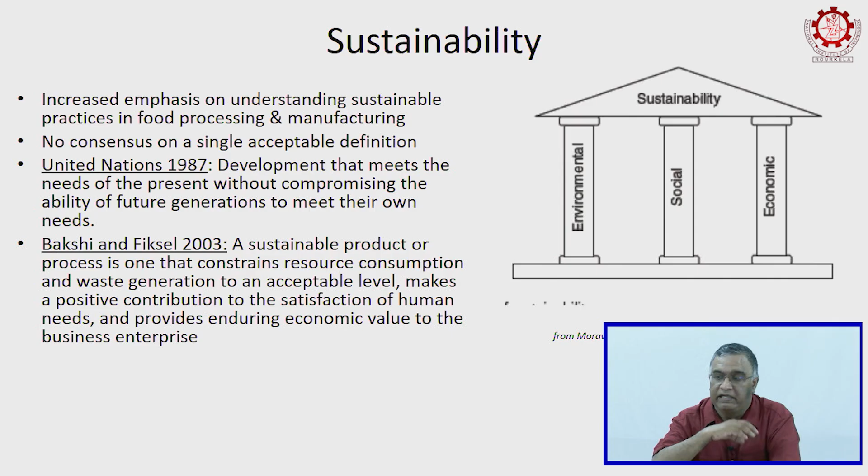Sustainability broadly speaking has three components: the environment, the social aspect, and the economic aspect. So, you cannot just have sustainability primarily focused on the environment and social without paying attention to the economic. You have to have the economic, the social, and the environment all balanced, so that you have a sustainable society.

From a food company point of view, you probably have all these three things interact. You have broadly speaking an environmental, a social, and an economic subsystem. Let us say you have the company here; the company probably receives some energy, water, minerals, all those things. It occupies certain land, uses some capital, and also uses some labor.

With all these things it is going to produce food, and the food is going to support population growth, feed the people convenient food. That profit probably generates some taxes, which in turn helps the society or the government pay for social projects and things like that.

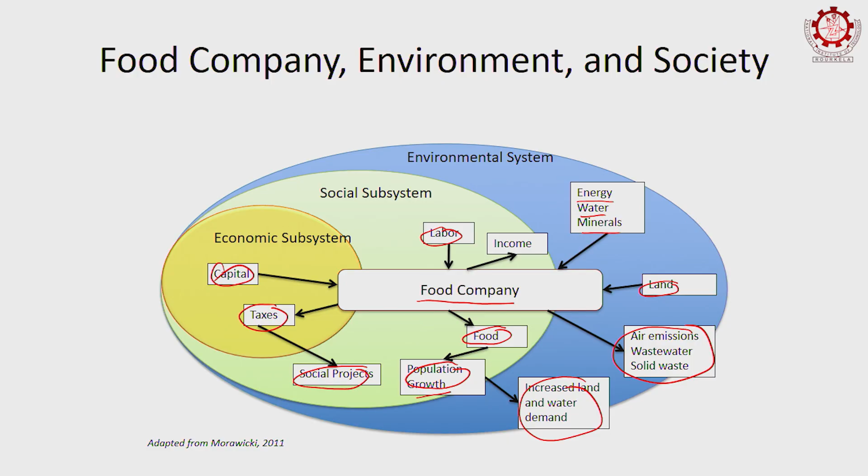So, today food processing is basically linear. That means you start with the raw material, then you probably process it, then send it to the retailer or distributors, then the consumer, then you probably generate waste. So, the waste is going to affect the environment, but there is no effort to fix this problem.

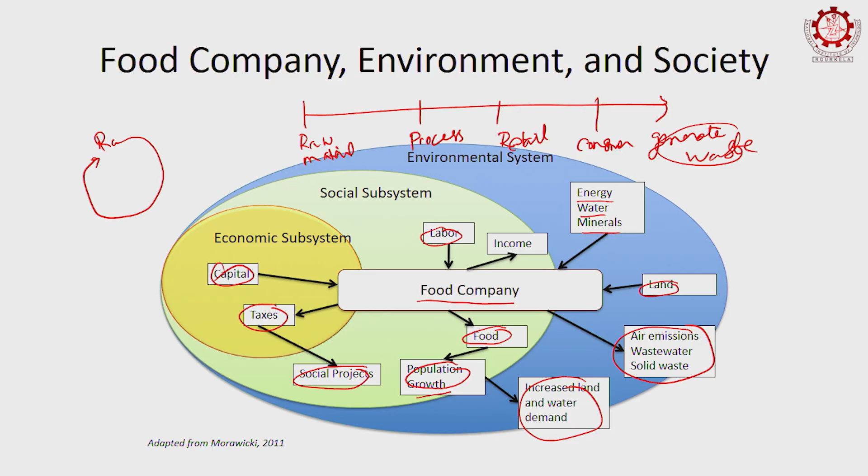So, what we need is a circular economy or circular concept. That means you start with raw material, then go through processing, and then you have a circular concept, so that it minimizes waste and leads to better utilization of resources.

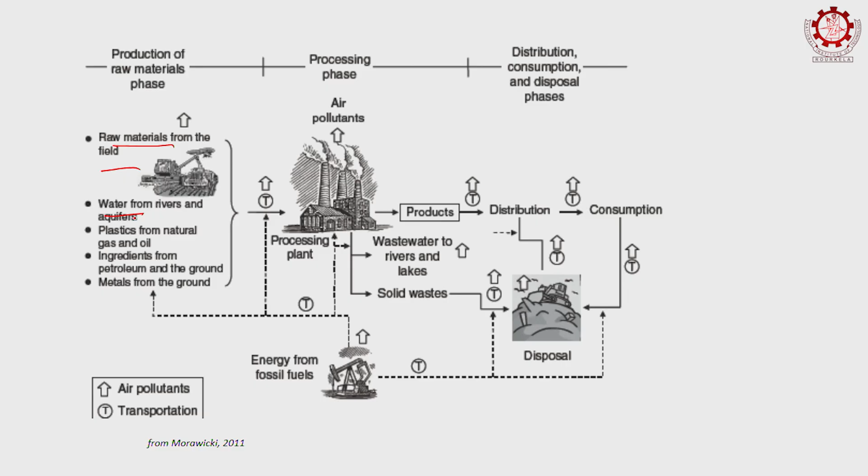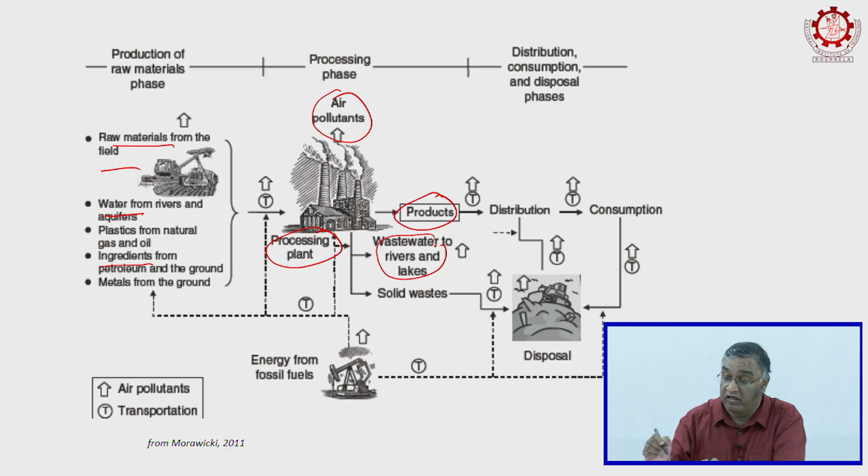To illustrate the same concept: you have the raw material, water, and then ingredients and other things supplying the food processing plant. The processing plant produces air pollutants and then products, but it also generates wastewater, and creates pollutants along the way when you distribute, and then when it goes to consumption, along the way you create some pollutants.

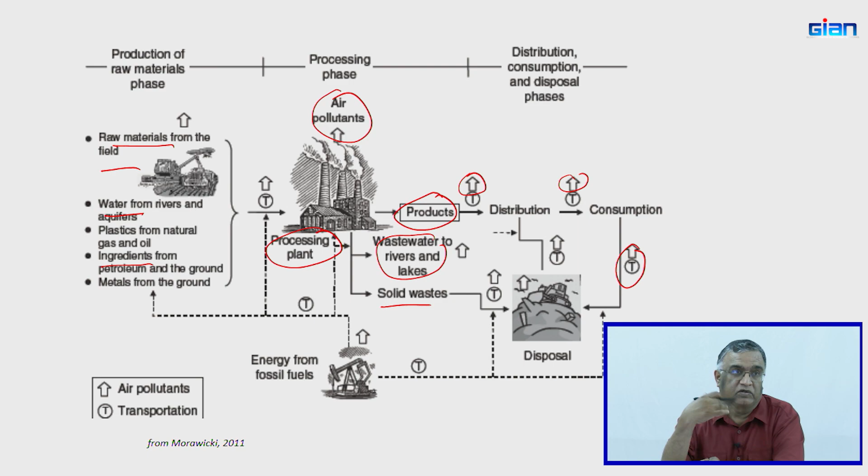It all happens in a linear manner without any effort to recover and have a circular economy. So, there is a lot of waste being generated as part of this economy, and that is where there is emphasis on sustainability and also on improving circularity. The circularity concept is very simple and interesting, but doing it in practice is much more challenging.

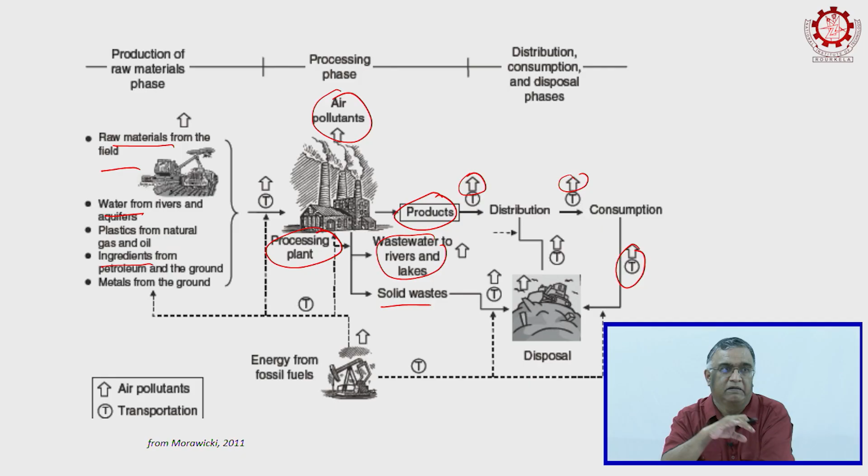So, how energy intensive is food processing? Whether you do pasteurization, canning, evaporation, spray drying, or any other food processing methods, it is very highly energy intensive.

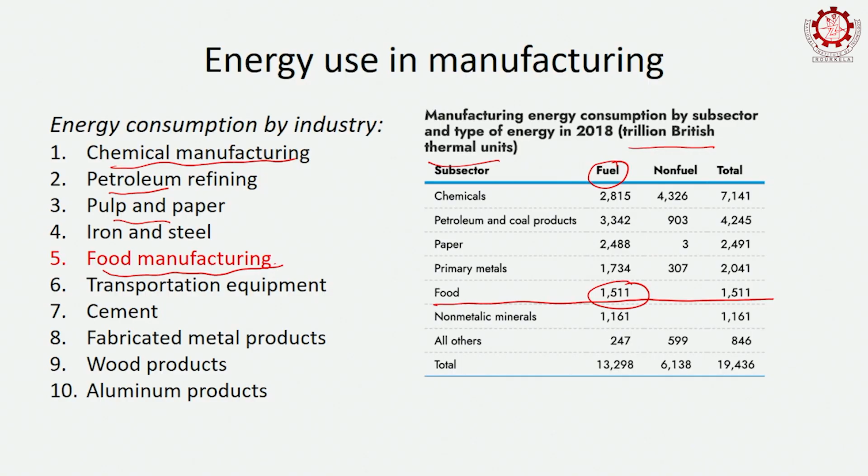When we use food process operations, we use this for various things: heating, pasteurization, cooking, blanching. A lot of food process operations are there. In addition, you can add to the list drying, evaporation, so many things. We do refrigeration and freezing.

This is different country to country. In the US, they have a very robust refrigeration and freezing network, so they are able to maintain that, whereas in India, probably some of the network is relatively in infancy. It is kind of evolving, but nevertheless you use some energy there.

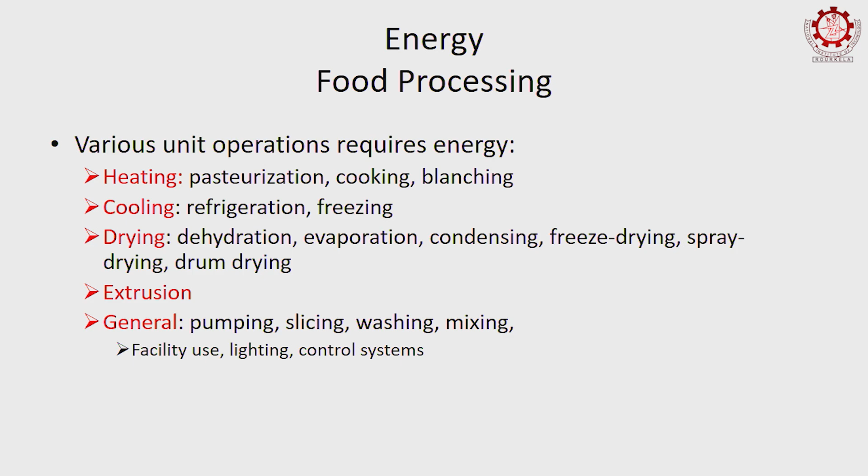You can do processes like extrusion, and then you use energy for pumping, slicing, mixing, different things, as well as use of lighting for the facilities control systems.

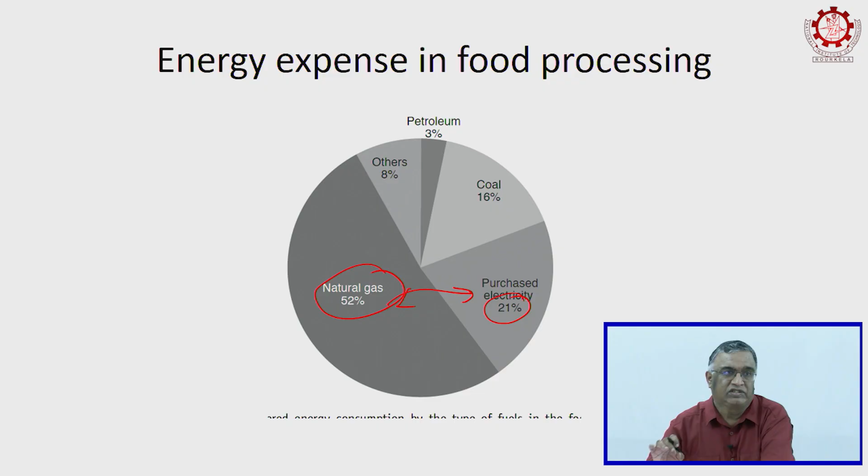But imagine we swap these numbers, maybe 50% electricity used and only 20% natural gas used. Then that electricity, there are many ways you can generate it, right? You do not need to rely upon natural resources. You can probably use in India, for example, solar energy. You can use geothermal, you can probably use nuclear. There are so many energy options available.

That is also much more energy efficient because, for example, when you use high pressure processing, you use electricity to pump and generate the pressure, and then the pressure energy is delivered to the product. There is not much wastage of energy along the way.

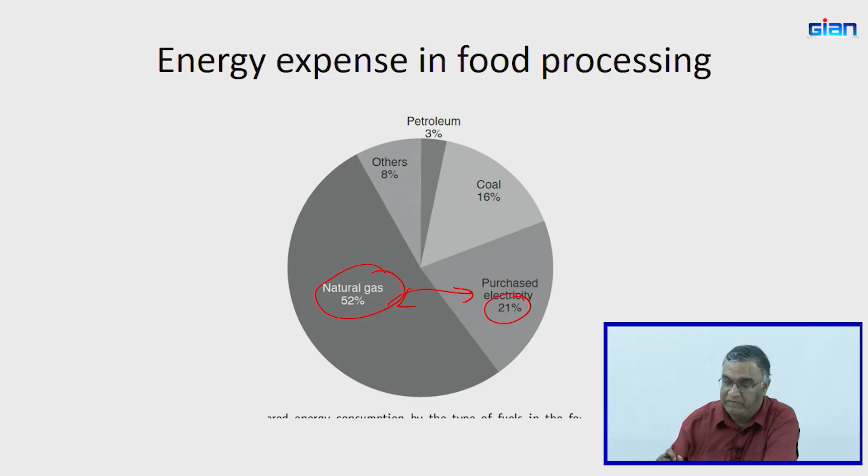Whereas if you use the autoclave for sterilization, you produce the steam, then it is transmitted where there's a lot of transmission losses, and then from the plant side to your processing plant, again a lot of energy losses occur. So that's where attention needs to be paid to switching to more electricity based food process operations rather than relying upon petrochemical type operations.

Within this you probably use about 59% process heat, 16% refrigeration, and then the rest are other categories of energy. What is process heat?

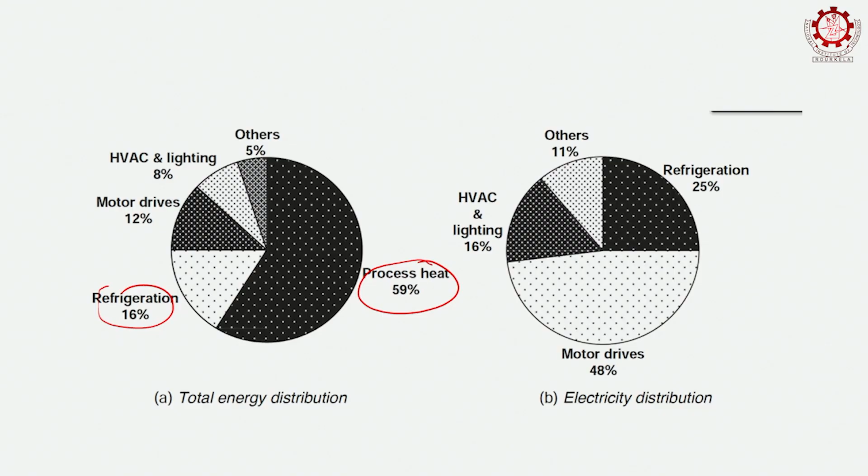I mentioned when you use fossil fuel to generate steam, from the steam you use that for heating your canning equipment or drying various things. That energy required to generate the steam vessel is oftentimes called process heat in the literature, particularly in chemical engineering literature. That's probably almost 60%, which is a very major factor contributing to environmental issues with food processing.

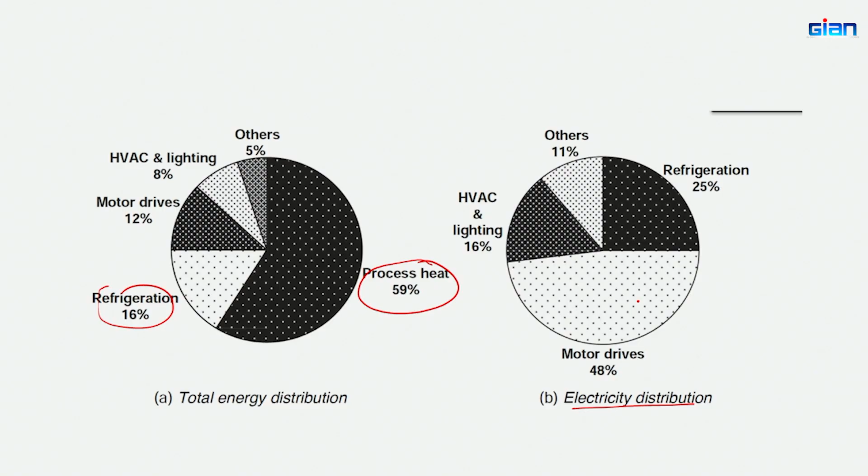Within the electricity use, you mostly use it for simpler operations like driving your motors, lighting, refrigeration, and things of that nature. If you look at the energy distribution, you probably use about 75% of energy for heating and cooling, 12% for process equipment, 8% for facilities.

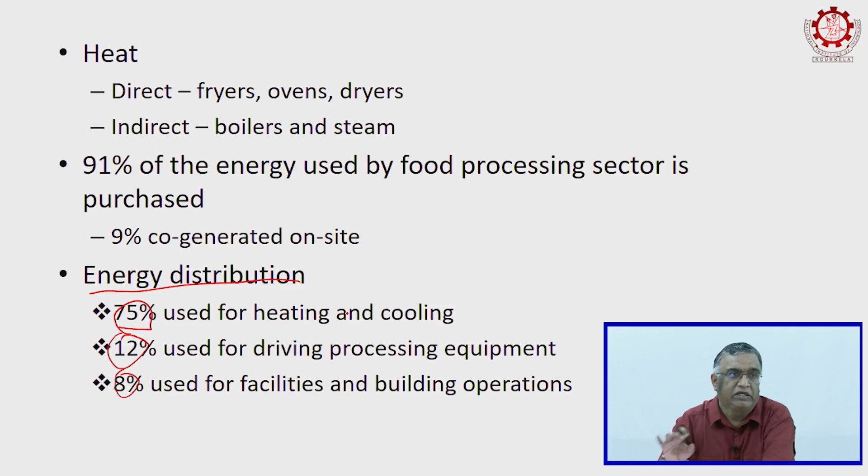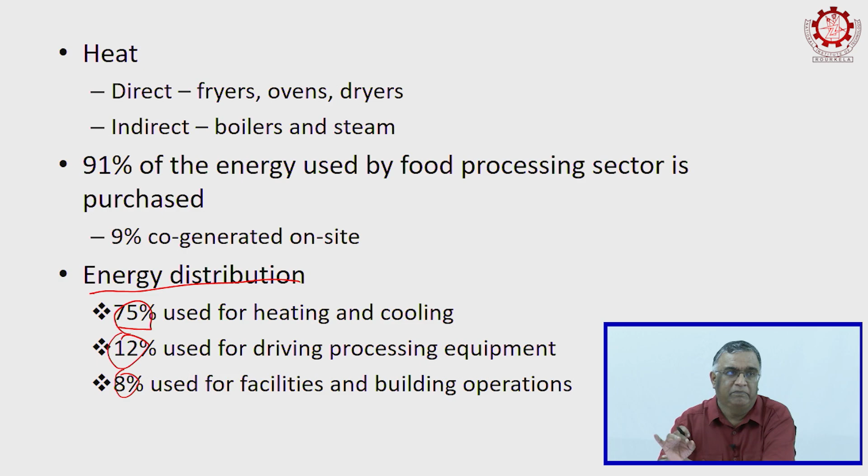This is where you have the opportunity to improve your energy efficiency. Right now this section uses a lot of process heating. If you can switch to electricity, you can probably improve your overall energy efficiency, and also help reduce the impact, because you may have thousands of food processing plants, each contributing a little bit, and you can get a major thing accomplished.

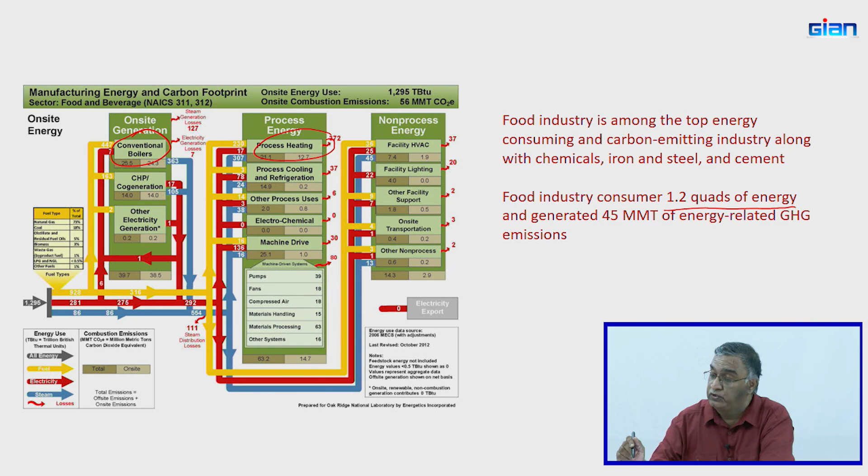According to some estimates from the US Department of Energy, about 1.2 quad of energy is generated, resulting in probably 45 million metric tons of emissions.

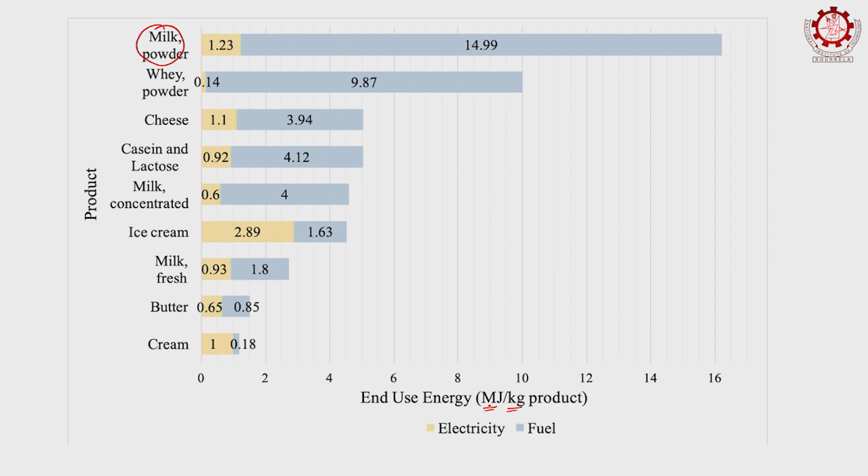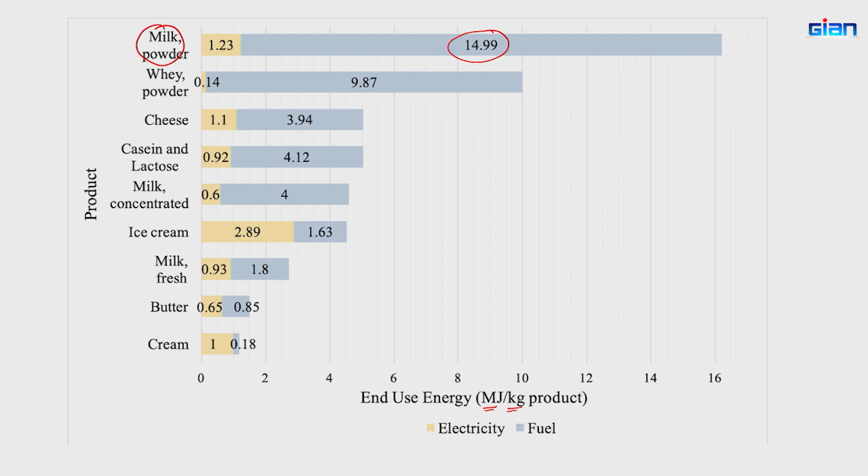That's kind of the major portion. Whereas if you look at something like cream, you use very minimal energy from fuel, whereas about 1 unit you use electricity. Look at ice cream: 2.89 electricity, and then 1.63 fuel.

So you can see that depending on the different processing products, you probably have different amounts of electricity versus fuel used. The goal is to maybe increase how much electricity you can use, since you can always generate electricity through a variety of ways that have minimal impact on the environment, rather than relying on petrochemical type products.

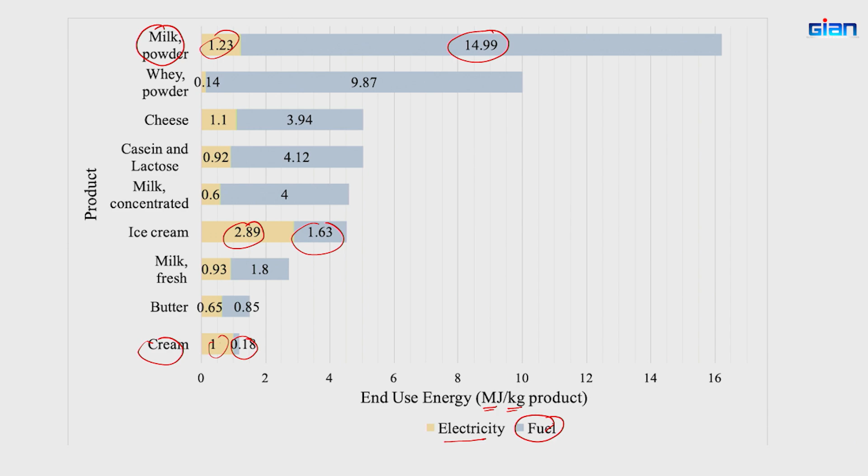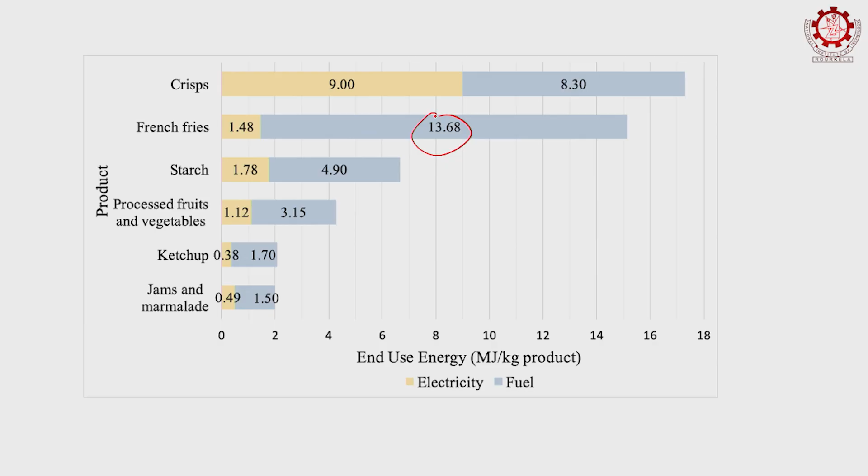Here are some additional things. Look at French fries: about 14 megajoules per kilogram versus 1.48 or 1.5 for electricity. Whereas if you look at jams and marmalade, it's a relatively simpler operation, about 1.5 versus 0.49.

So the take-home message is that most current food products are energy intensive and rely more on petrochemical energy than electricity, which leads to some potential environmental effects.

We talked about various food process operations in this class, particularly looking at advanced thermal and non-thermal processing methods such as pasteurization and sterilization. But beyond that, there are many other so-called unit operations - for example, drying, evaporation, extrusion, spray drying. There are so many unit operations.

Among all these different unit operations, one of the most energy intensive is drying. For example, if you are doing a drum drying operation, the product is being washed, peeled, pre-cooked, and mashed. Let's say this is a potato type product, and doing a drum drying, you are going to need about...

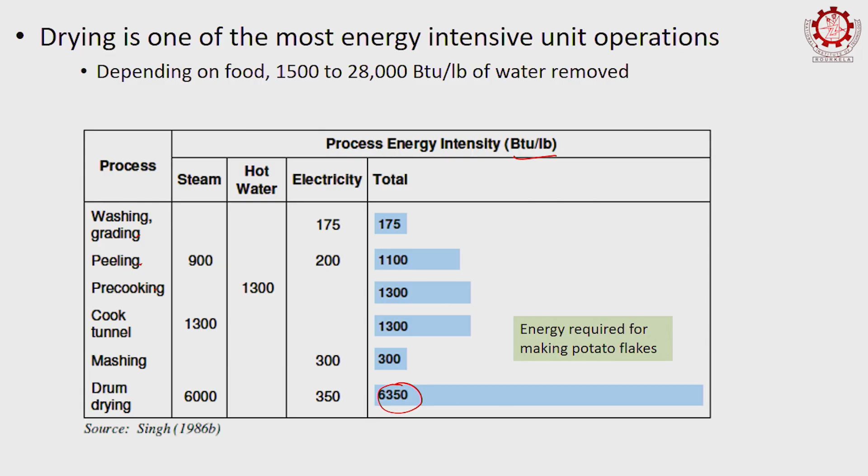So there is an urgent need for developing more energy efficient technologies to significantly reduce energy use, or increase energy efficiency. Now, energy efficiency can be improved in a couple of different ways. One, you can always recommend going and developing new technologies, and I think there is room for that, but you also have the opportunity to fine tune, optimize, and improve existing food process operations.

We talked about drying being one of the more energy intensive operations. So let's say you dry vegetables - rather than directly drying the vegetables, maybe you can add a dewatering step where you take the vegetables and find a way to remove the water, so that the dryer does not need to work that much harder to do its work.

For sugar beet drying, they may use a press to remove the water, so that you can then put them into a rotary dryer and save some energy there. Similarly, a lot of vegetables you can pressure treat.

For example, 300 megapascal or 400 megapascal pressure for a couple of minutes. This is not done for the purpose of microbial inactivation, but it is going to permeabilize the cell membrane. That means within a bacterial cell, or your vegetable tissue, it is going to push the water out, so that when you do the drying operation, the drying kinetics can be much faster.

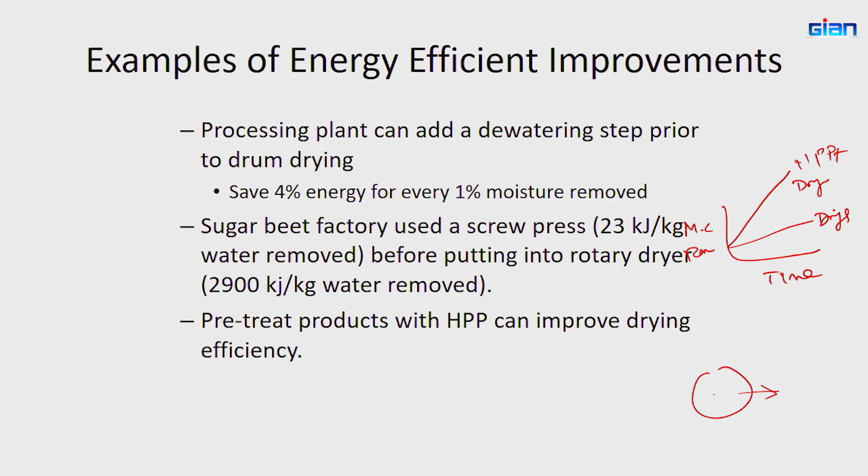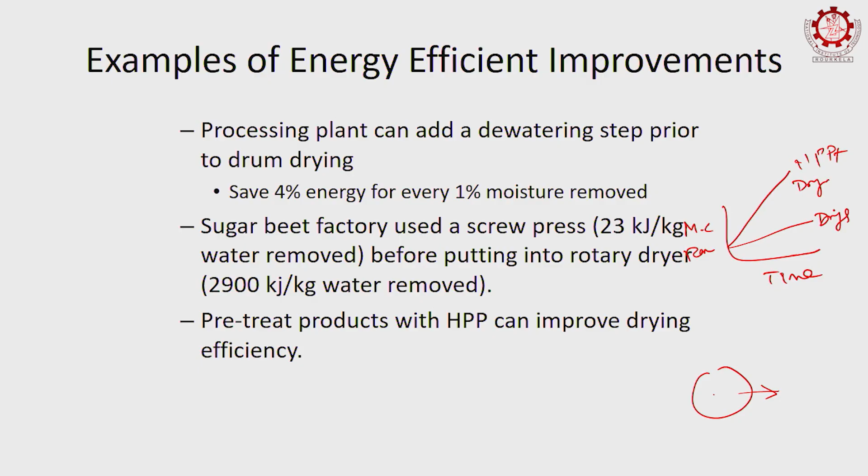The same thing can probably be said about PEF and UV - a number of new technologies have the capability to permeabilize the water. So a lot of processing plants use boilers.

Most of the time these are legacy plants operated for 30, 50 years, and that means maintenance attention to them becomes less and less. A lot of the boilers may have salt deposits and may be poorly conducting heat, transferring the energy. So there's a need for regular maintenance to improve the boiler efficiency, and you can add some insulation to have better efficiency.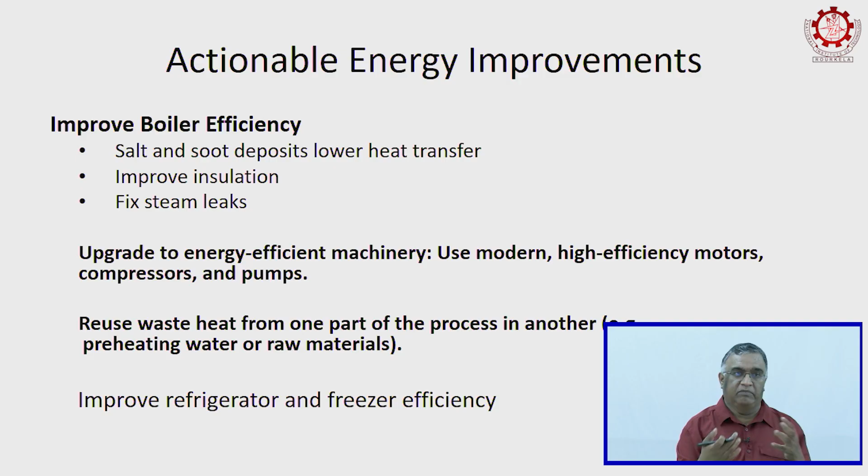When you produce steam with the boiler, there's a lot of steam leak along the way. If you go to a food processing plant, especially those using boilers, you can see some of them are really warm. Part of the reason is there's a lot of steam leak, and if you fix some of the steam leak, that can add up in terms of improving energy efficiency.

You can use energy efficient motors, compressors, pumps, and another thing quite easily done is you can use the waste heat from one part of the process to another.

Anybody know what is the classical technology that does that already? In other words, you are heating a product, then you capture the energy content of the heated product to recover that heat to heat or cool something else. A classical technology does that already - anybody know? It's pasteurization.

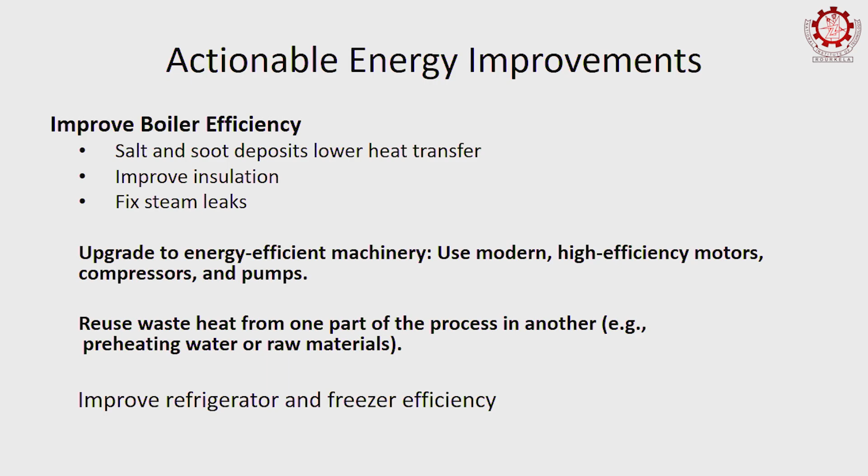If you do the pasteurization study, you can see that when raw milk comes in, it's pumped through, initially about 5 or 10 degrees Celsius, then it goes through homogenization, and here it begins to be heated by the outgoing processed milk. The processed milk is already at a higher temperature, 72 Celsius, so that outgoing milk is going to heat the incoming raw milk.

So two things happen: the temperature of the incoming raw milk increases, so you are accomplishing some heating, whereas the temperature of the outgoing heated milk decreases, so it cools down. Then it goes to the homogenizer, the holding tube, and in this section you're using some heat to bring this to final pasteurization temperature, and coming back here you give out that heat to the incoming raw milk. Then you use some glycol water to cool further, and then you can package them.

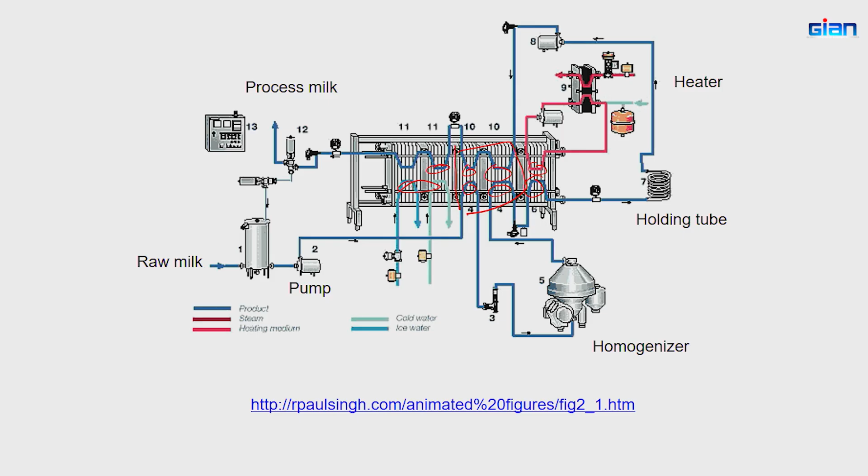So this section where you are recovering energy from the outgoing product to heat, in this case raw milk, is called a regeneration section. If you don't configure this way, you probably lose that heat energy as waste, and you probably spend more energy to cool the product down. Whereas here we can utilize that heat to capture and at the same time get a benefit.

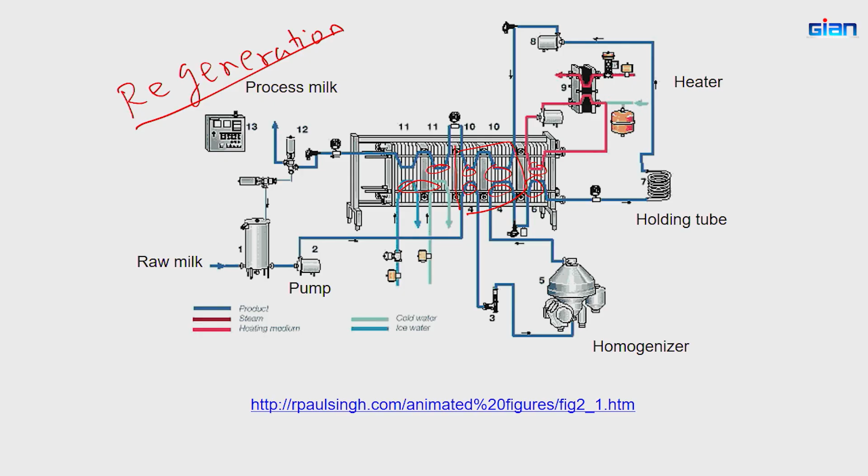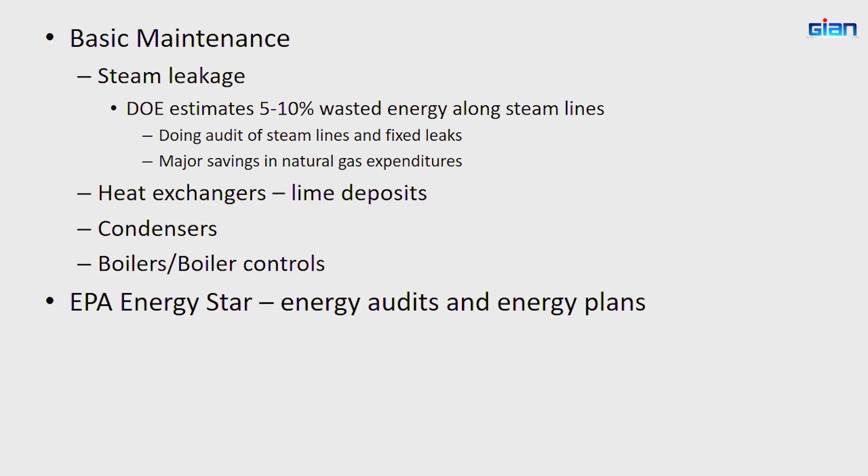So many food process operations can be modified so they can capture energy in an efficient way of operation. We already talked about steam leakage - 5 to 10% of steam energy in steam lines, so you can probably capture steam there. And with heat exchangers, lime deposits may be there too.

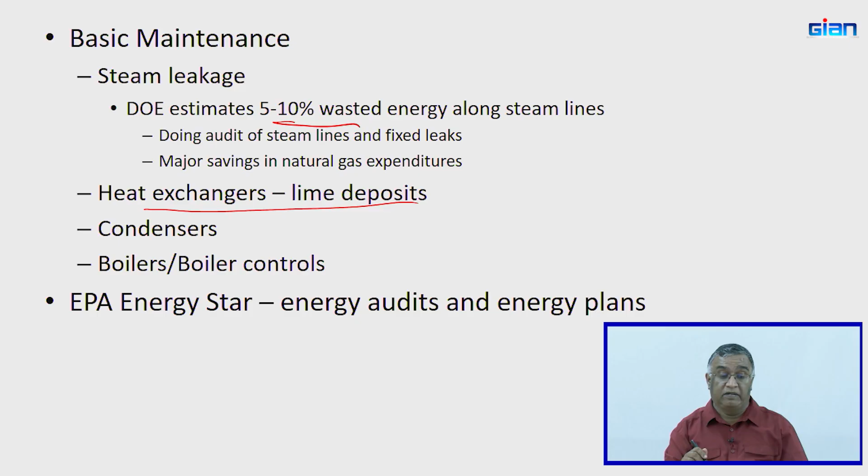Now in the US, EPA has what they call energy audit, energy star plans. They audit different equipment and then provide certification - this is an energy efficient machine. So food processors who want to buy them can choose those so they can have better energy efficiency.

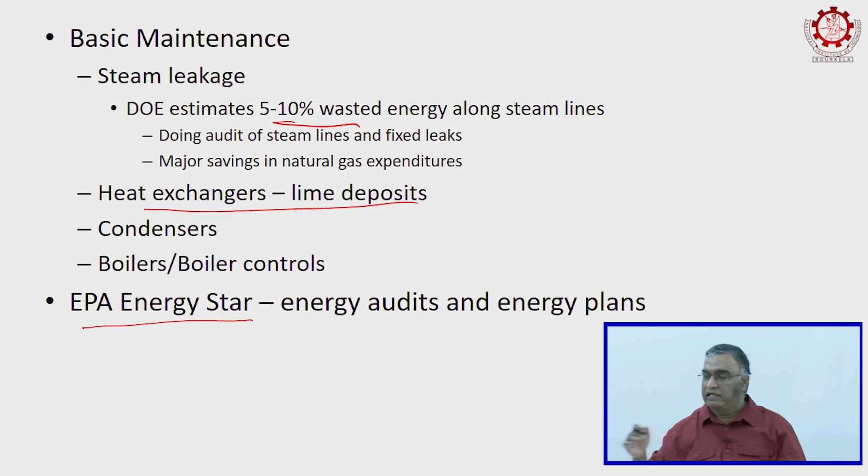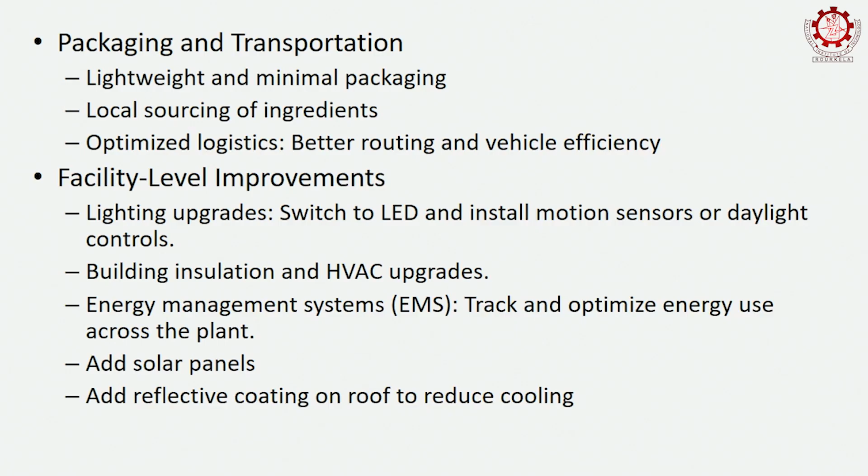Instead of using heavy transport packaging material, you can use a lighter packaging material so you can reduce transportation costs. Why do I need to switch? For example, if you have a processing plant here in Rourkela and you have to bring an ingredient from China or Europe, there's a lot of transportation involved in bringing that ingredient. Instead, can that ingredient be procured locally within Odisha or a neighboring state, so that it cuts short the ingredient cost or transportation cost.

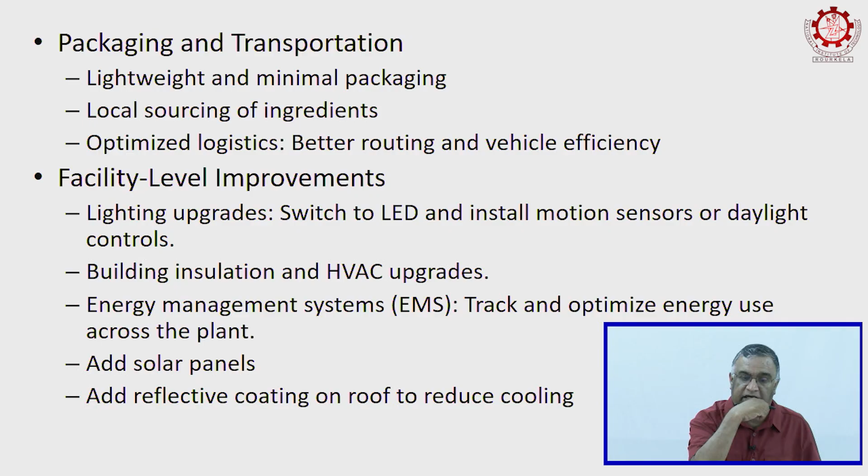You can do energy improvements in the facilities. For example, most facilities are now switching to LED lights, and you can also improve the insulation, HVAC, and add solar panels.

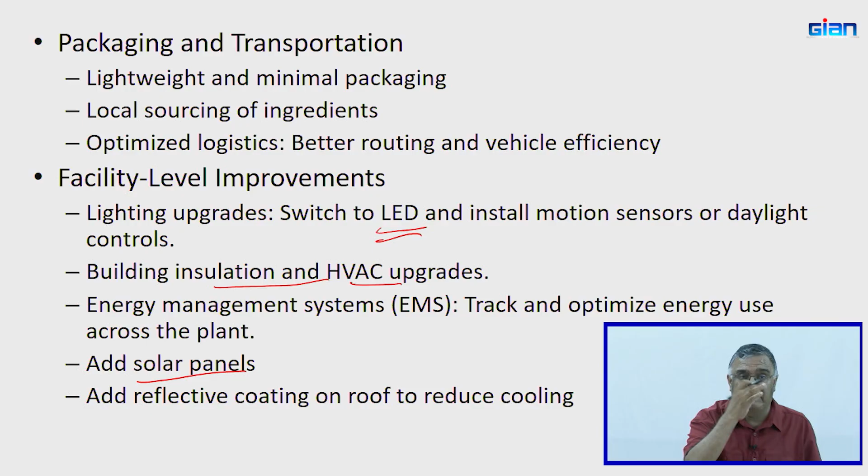A lot of food processing plants have a lot of floor space as well as roof space. You can probably add solar panels on top of those plants so that it can generate electricity that you can use for running your processing plant, so you can significantly reduce the operational cost.

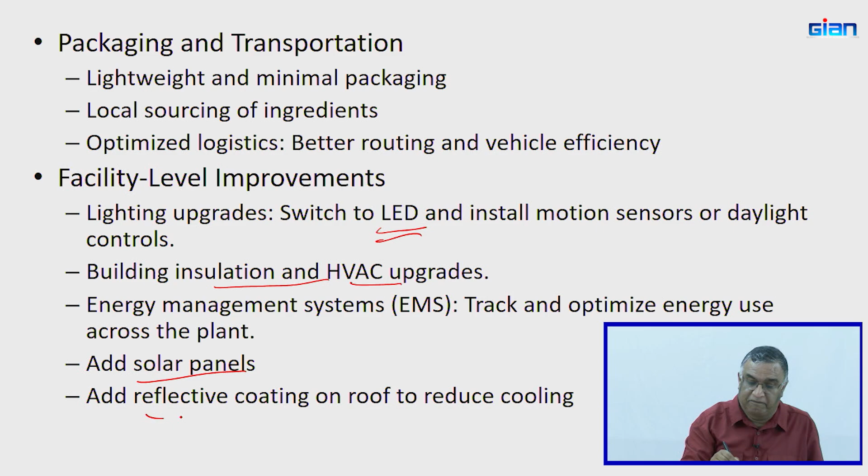If you don't have that luxury, at least you can put what they call a reflective coating on the top of your surface, so that the light rays are reflected and the facility is not overheated.

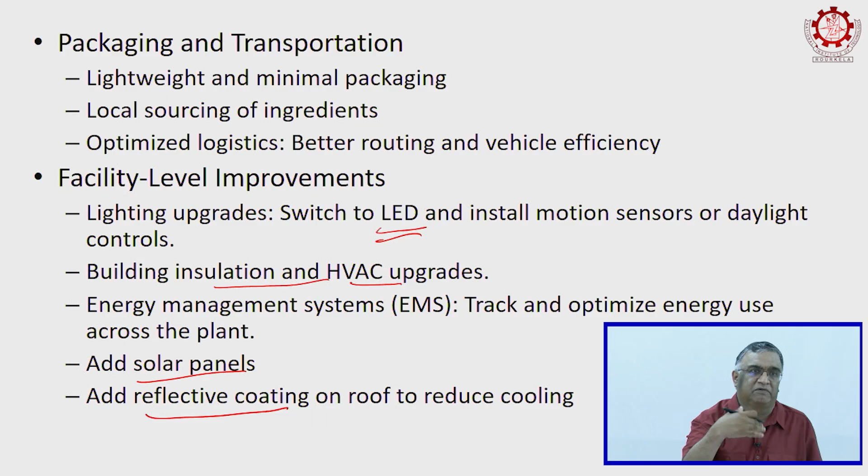So, on a hot summer day like today, you can probably reduce the need for so much refrigeration and things of that nature. So, we already talked about the need for renewable energy.

You can add solar panels, or if you have biogas from food waste. Let's say you are processing tomato and you have a lot of pomace left, maybe you can recover some of the lycopene from the pomace so that it is a value added process. That is part of your valorization, which we will talk about later in the class. But then you have some leftover material, and that material maybe you can use for making biogas, which can probably provide a source of energy.

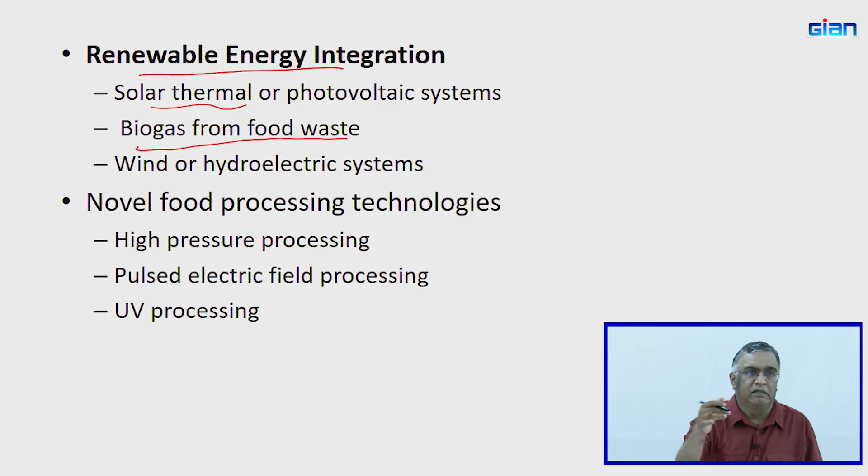When possible, you can use wind or hydroelectricity, geothermal. Geothermal basically is the energy captured from the earth. You can probably do that too.

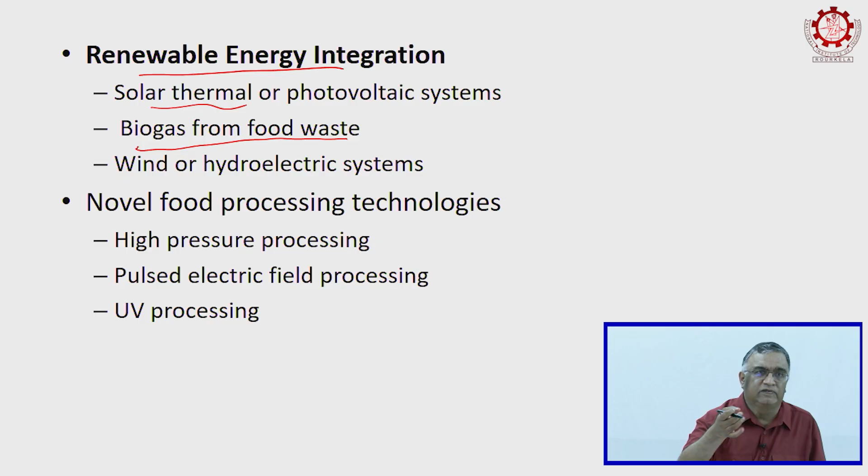We already talked about some of the novel processing technologies like high pressure, PEF, UV, all those things. They can probably also help, because they rely upon electricity, so they simplify the energy use. In addition to that, they have a superior quality product.

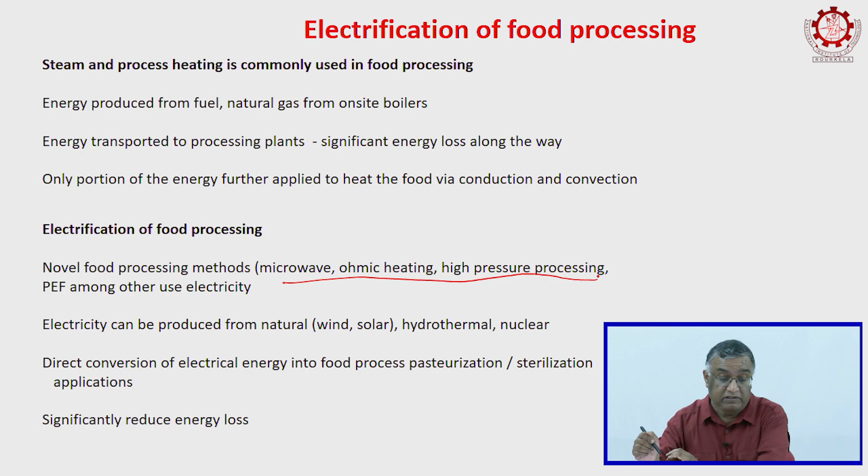The electrification of food processing is probably a key emphasis right now. For example, the Department of Energy in the US identified food processing among the top 5 energy intensive processes. Now they are encouraging processors to find efficient ways to do that, and one approach being proposed is electrification of various food process operations. For example, you can do microwave, ohmic, high pressure, PEF, and then you can also directly convert the electric energy into pasteurization and sterilization applications.

One of the benefits of going to electricity in food processing is that many of the advanced processing methods, either thermal or non-thermal, have a much shorter come-up time and reduced processing time. So there is a significant improvement in product quality. You can have instantaneous start up and shut down. When you have a boiler, you have to take time to heat and take time to cool down, so there is a lot of energy loss.

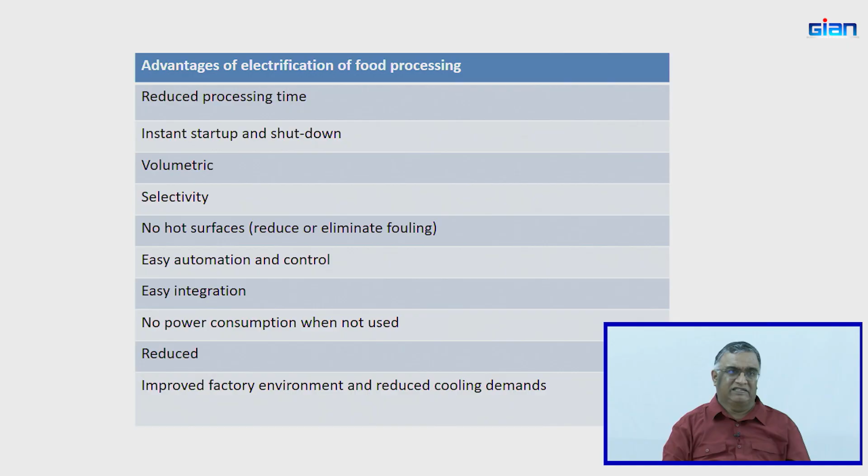Many of the processes we talked about earlier are volumetric, which means you have less temperature gradient. Once you use pumps and electricity, you can also do a lot of automation, meaning you can control things with computers. So that means you can have what they call Industry 4.0, where you can make a lot of different automations. Once you have those types of things, you can bring in AI and other technologies so that things can be much more easily integrated.

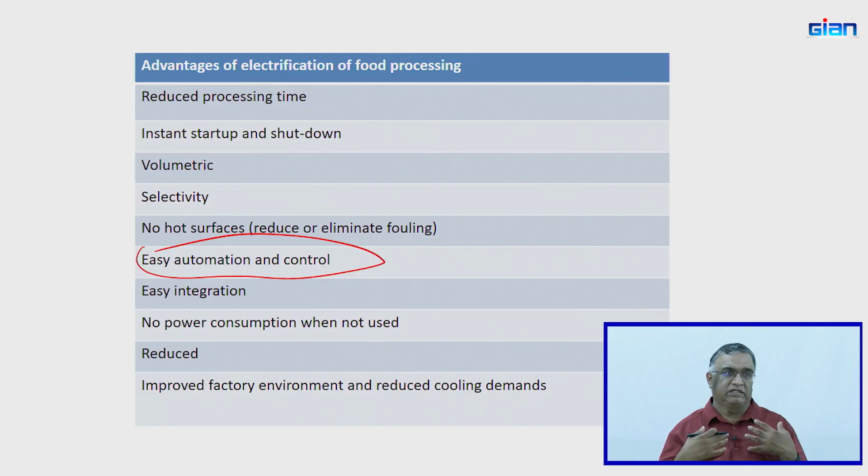I think there is a lot of potential benefit, but the challenge is that investing in new process technology is resource intensive, whereas the general process equipment being used is used for 30, 50 years, many years. The mindset for the industry is, it does not break, do not fix it. So they just want to keep using it because it's working. Why do we bother to fix it or change to a new technology?

So the next couple of slides just show how switching to some of the newer processing methods in different cases will help save energy and save time. For example, I can pick one here: garlic clove. If you use microwave, it can save about 70% energy.

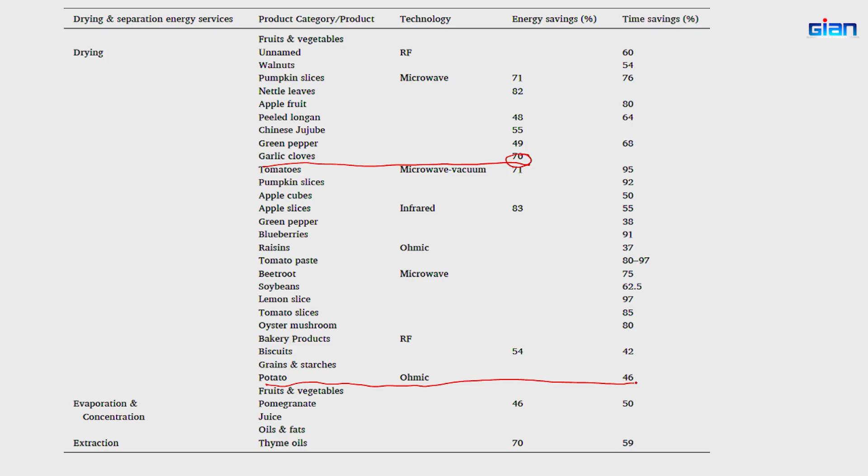And I can probably look at another one, potato with ohmic: there's a 46% time saving, and so on. Again, you have several studies available and this literature is accessible, so you can probably take a look at it.

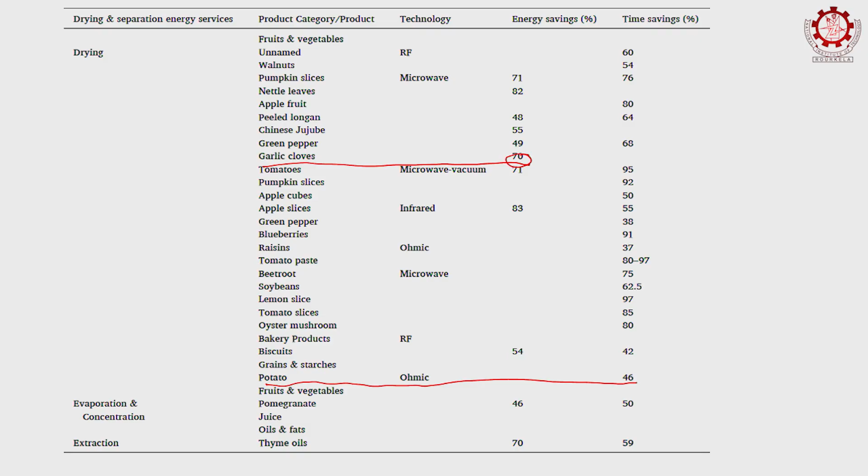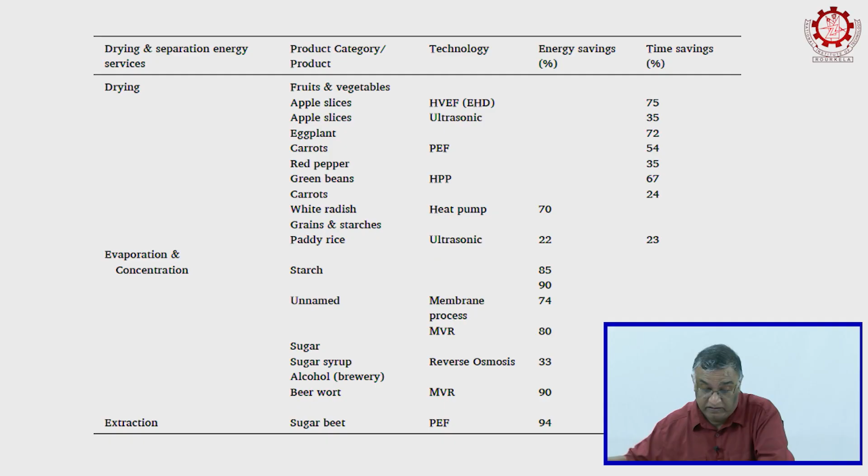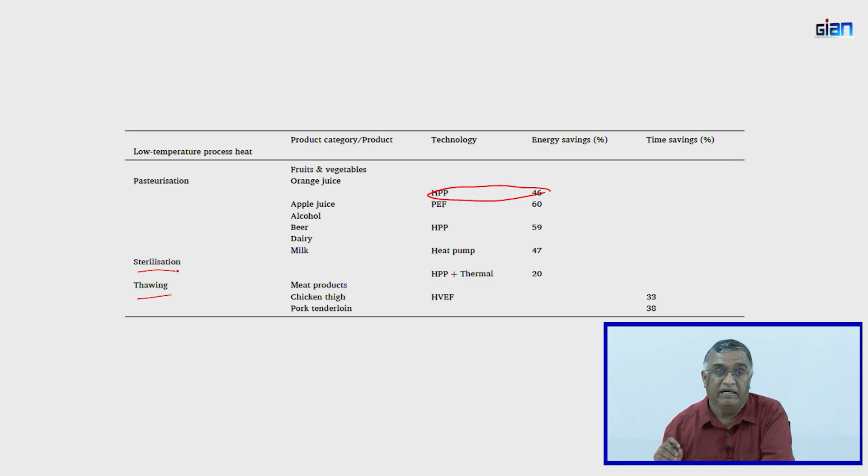Similarly, you can do these new technologies not only for pasteurization and sterilization, but also for part of the evaporation, concentration, and extraction. For example, for sugar beet extraction, PEF can save about 90% energy. And if you look at pasteurization, high pressure can save about 46% energy in the case of orange juice. Then you can probably do thawing, sterilization, many of these unit operations. So switching to new technology not only improves product safety, quality and nutrition content, it also helps improve energy efficiency.

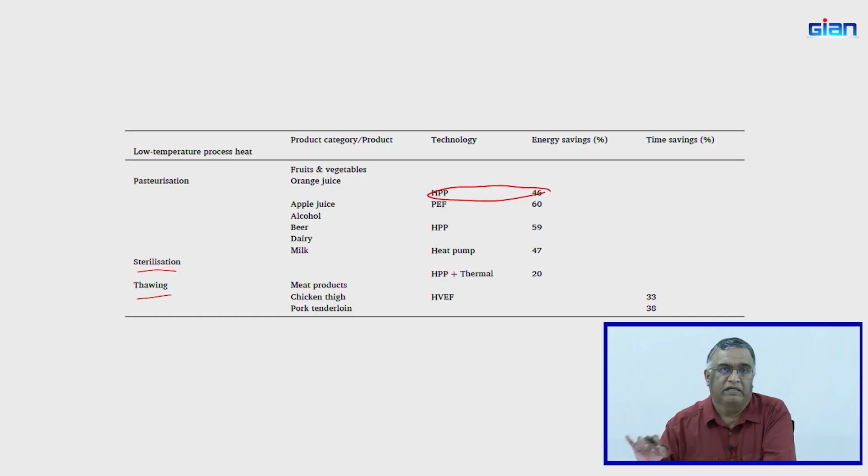Next, we are going to switch to water use. Food process plants use a lot of water, ranging from cleaning and sanitation. You probably use it as part of the ingredient in formulation of products, and you may be using it for washing and rinsing product, because for example, when fruits and vegetables come in, they may have a lot of dirt, so you may use water to remove all the dirt.

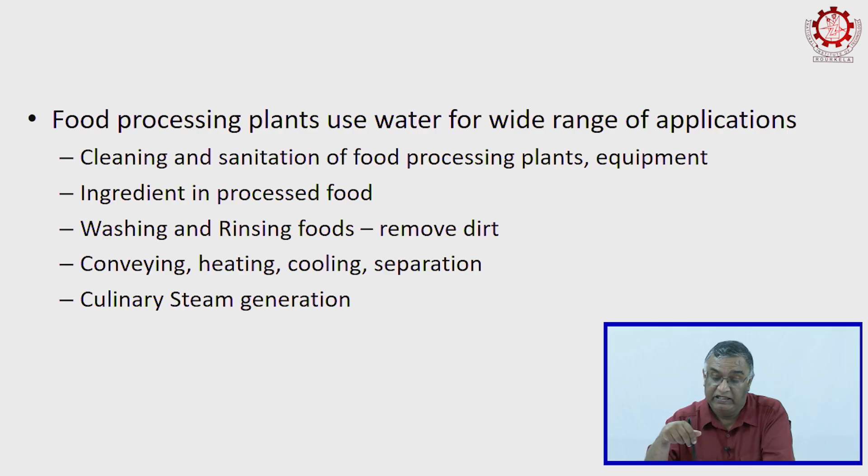You may use it as part of the conveying, heating, cooling, separation process, and then you probably use it for culinary steam generation. And if you look at the big picture in the world, about 98% of the water we have is salt water.

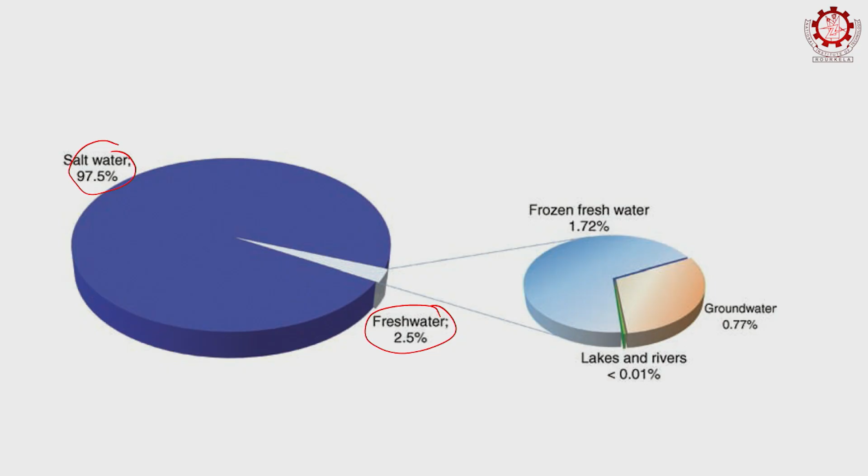Only about 2.5% is fresh water - that's the water available not only in India but in the entire world. Most of it is covered in the sea, and we probably need to spend a lot of energy to convert that into fresh water. Out of the fresh water, groundwater is about 0.7%, lakes 0.01%, and something frozen about 1.72%. So if you look at the big picture, you can see how limited our water supply is.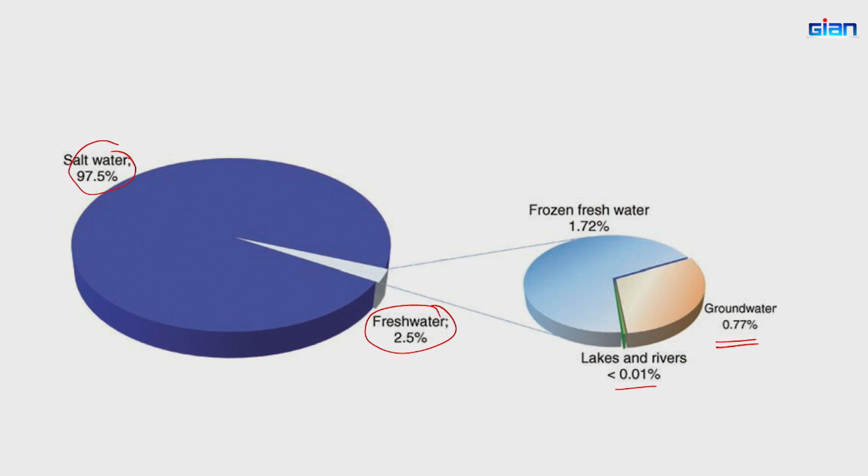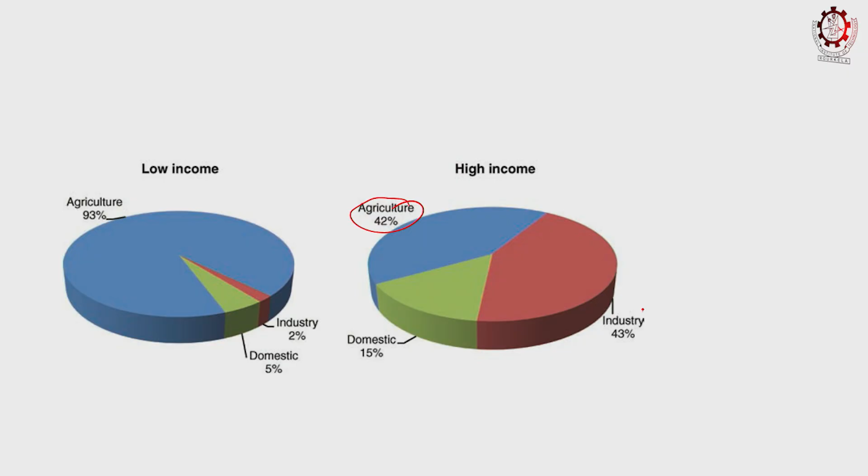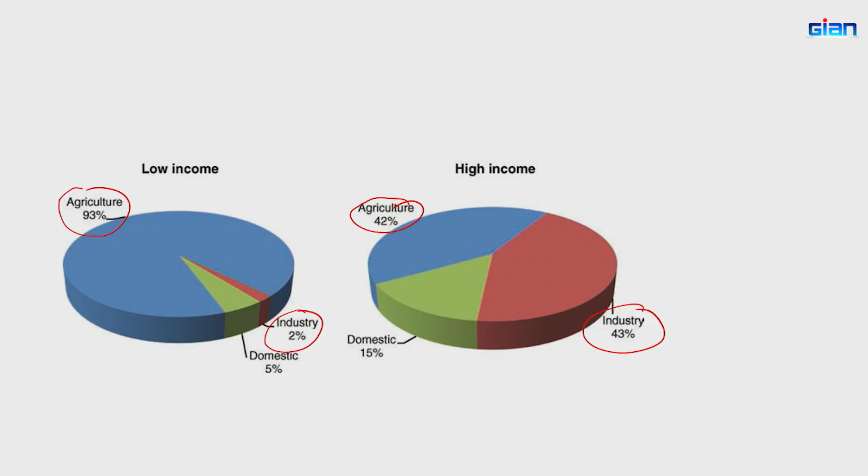How different countries use that water is also interesting. Those countries which have a lot of income, the developed countries, probably use about 42% for agriculture to produce food, whereas they use 43% for various industrial applications, ranging from petrochemical, cement and other things. On the other hand, developing countries or low income countries rely a lot on agriculture and food processing - 93% is used there, whereas they probably use almost 2% in industry and other applications. So the water use varies by country to country - it's not universally the same type of thing.

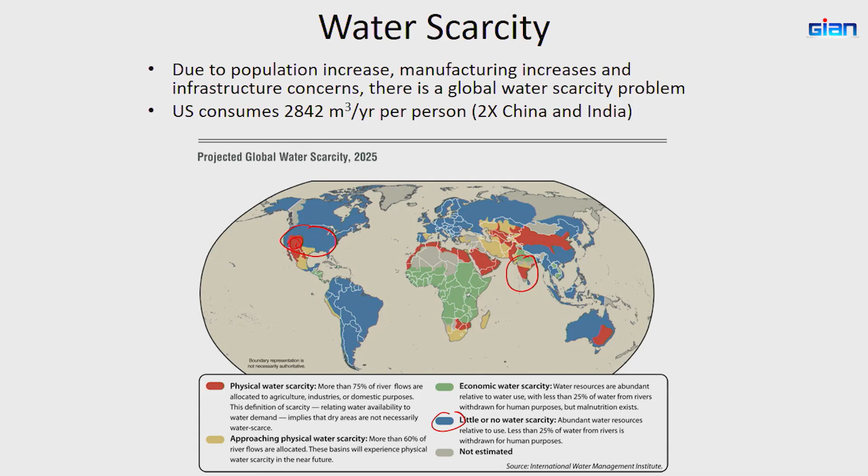The green water is the water footprint associated with rainwater. So whenever, especially in a country like India, where there's a monsoon season, the rain you get is probably the green water. Oftentimes India still needs to make a lot of progress, because a lot of times you get a lot of rainwater, some days you don't get any rainwater. Then when you get a lot of rainwater, people don't take proper precautions to harvest it, so that water eventually runs into the sea - you are not capturing that rainwater. So there's more emphasis on rainwater harvesting, so that that water gets to the groundwater and can probably be useful for a longer time.

The gray water is probably the water footprint associated with polluted wastewater. So whenever you process it, you may be polluting it. When you have household use, you're polluting it too - all those things. So this is kind of the gray water.

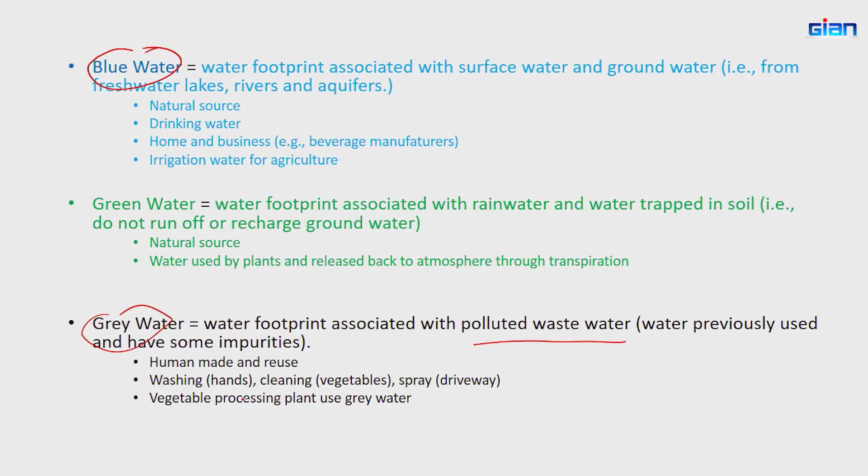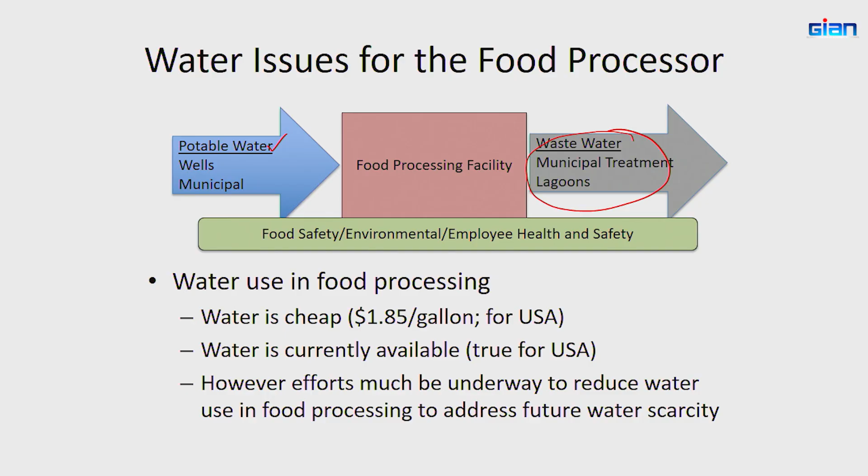We talked earlier that food processing uses a lot of water, and they probably demand potable water, because they do need to eventually use it for human consumption. One of the interesting things is, most of the time food processors probably aren't going to purify the wastewater - oftentimes it's left to the local municipality to treat it. The logic is companies pay taxes, and that way the municipality does the services for that. In the US, water is cheap, so they're willing to spend that much, whereas in India that's not the case - we have water scarcity, whereas it's beginning to emerge in the US. So there should be a way to reduce water use in food processing, so that you can take care of the water scarcity.

Other interesting statistics here - if you look at different food products, how much green, blue or gray water is shown here. Just to give an idea, if you are making pasta, producing 1 kilogram of pasta needs 1,849 liters of water. On the other hand, if you are making chicken, producing 1 kilogram of chicken needs about 4,325 liters of water. This means growing the chicken and then processing it - the whole thing is included there. Now look at the chocolate.

Even though it's a favorite for everybody, you can see that it requires about 17,196 liters, so from a water use perspective it's highly water intensive. If you look at beef, it's 15,415 liters, so again it's a water intensive process.

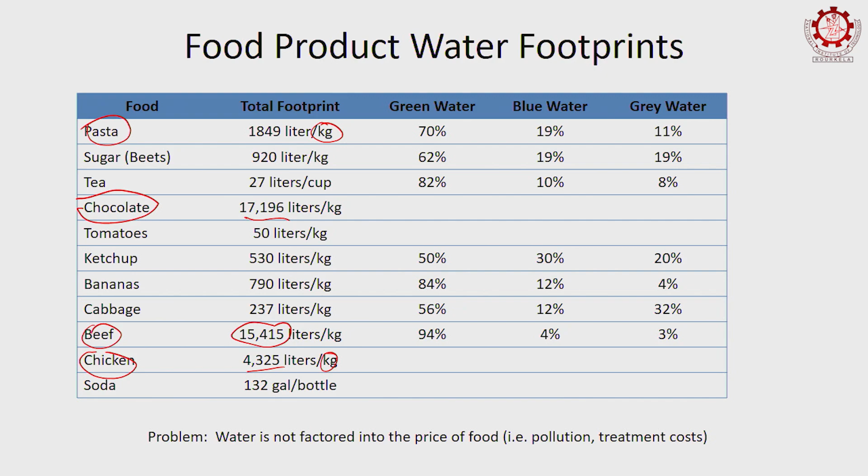So the idea here is, when water becomes scarce, which of these products is easy to make? Maybe you want to shift there and try to minimize the use of products which are more water intensive.

So maybe this is a question for the group. What can be done to improve water resources in India? India has water constraints, what can be done? Any thoughts? There's no right or wrong answer.

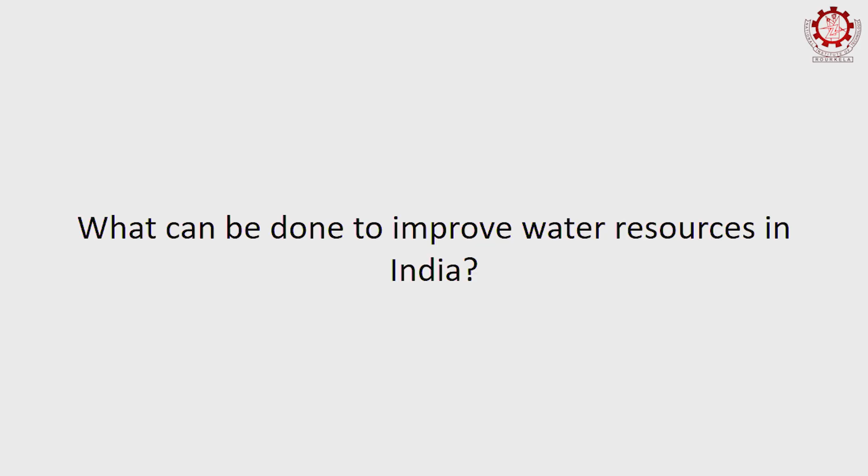In many parts of India, sir, people assume that rainwater is replenishing, that it will be replaced at the time of monsoon. So the bigger picture, the foremost and basic thing to improve water resources, would be rainwater harvesting and educating them. As we know, government at the state and central level are planning to dig some kinds of earthen ponds where they can store rainwater. They are emphasizing more farm ponds because agriculture takes a large extent of water.

As data shows, rice, for example, 1 kg of rice takes about thousands of liters of water. So government is planning to harvest water at the pond or farm level so it can be utilized, and underground water, which is a reserve for us, should not be disturbed. So sir, my suggestion would be, if we take this to the root level, we can conserve water more, and water resources would be beneficial for India.

Right, so rainwater harvesting, create more ponds, and conserve water wherever possible. So those are all good suggestions.

Other thoughts? Sir, the second one could be, as we know, from the 70s and 80s we were having participatory watershed management programs, which is what I first mentioned, at the root level, where we get rainwater directly. But in the case of hilly areas or rivers where water flows out, runoff is a problem to collect.

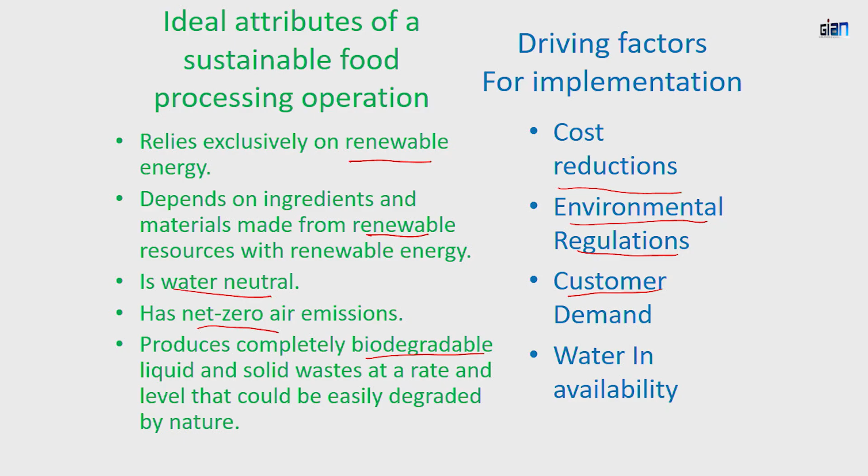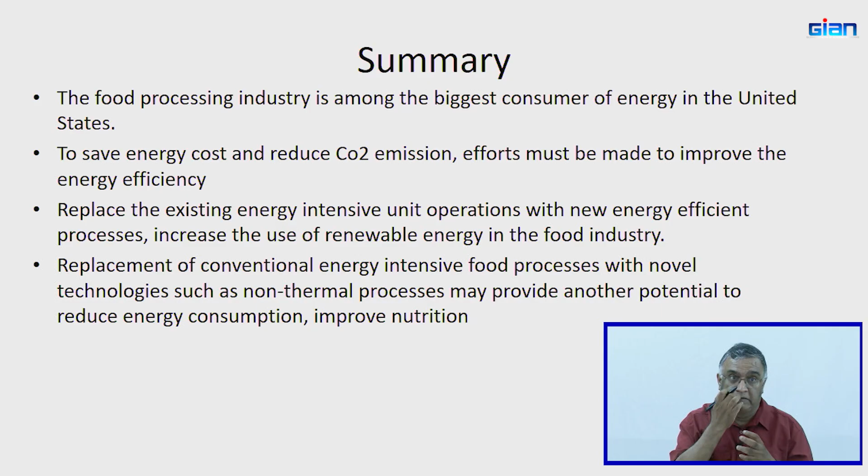Okay, I'm only going to buy sustainable, carbon neutral products, and then companies will respond to that. So in summary, the biggest consumer of energy, and a lot of water is also consumed, so reducing energy costs and carbon dioxide emissions improves energy efficiency.

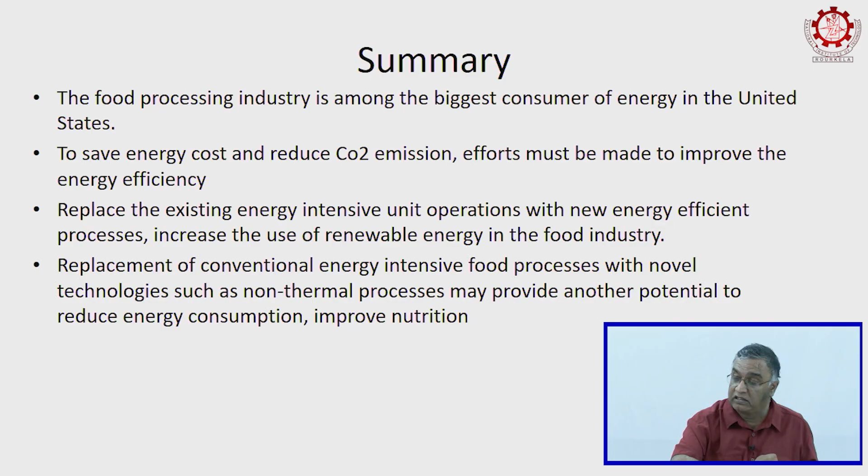Making energy intensive operations more energy efficient, using some conventional and new non-thermal technologies, presents potential opportunities. So with that, additional discussion.